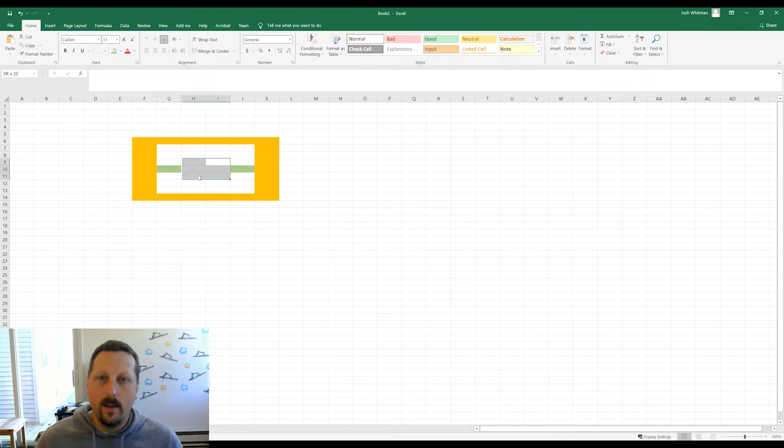We need to know some things about the gearbox before we try to pop it into FreeCAD and actually make some gears. So if we've got a ring gear, let's do some artwork here. Here's our ring gear. Okay, so you got a ring gear, and then you have a planet, and another planet on the other side, and then a sun gear. A nice blue sun.

Okay, so with the ring gear, the relationship between the teeth is: the ring gear teeth count equals the sun gear plus the planet gear on both sides. So 2 planet gears plus the sun gear equals the number of teeth for the ring gear. So if you had 100 teeth here and 50 teeth here, that would leave 50 teeth left, and between these two, that would mean 25 teeth per planet gear.

So knowing that relationship, let's start with teeth. We're going to say ring, sun, planet. And if we just choose an arbitrary number like 100 teeth in the ring gear and 50 teeth in the sun gear, the planet gear equals the ring gear minus the sun gear, divided by 2, and that's how many teeth we have.

So with a ring gear, you can do cool stuff with just a single planetary gear. But what I'm building is a compound planetary gearbox, which is 2 planetary gears that work in concert with each other. So we have a second planetary gear that also has ring, sun, and planets.

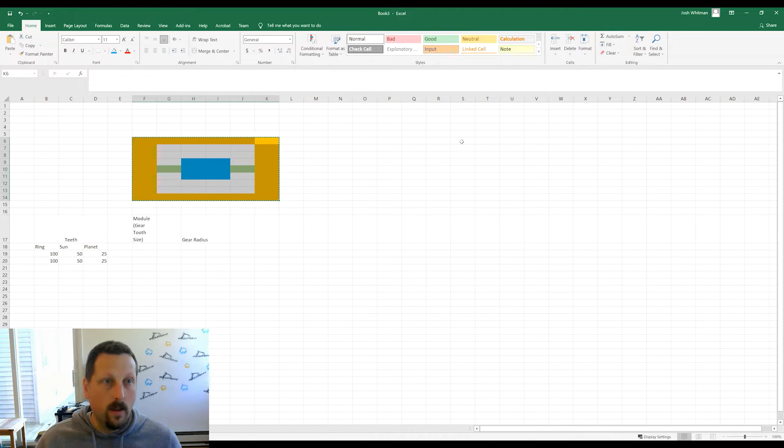Okay, we're going to start to mess up our amazing drawing here. So let's cut and paste. Let's move this elsewhere. Paste, paste. I don't know why it wouldn't let me choose paste from there. So our module—can we hit something like Shift Enter? No, okay. Looks great, so far so good.

Okay, so here's our tooth size, and this is defined by our 3D printer, at least in my case. I can only print teeth that are like 0.8mm at the tiniest, and that's way too small. So we want something like 1.6mm—2mm teeth are really good and chunky and feel strong, in my opinion, coming out of my printer.

So the minimum tooth size that you might want to work with can vary quite a bit. I can do 1mm teeth and rely on them in some situations, but 1.6 is a great tooth size, so we're going to work with that. That helps us define the gear radius, which is going to be the tooth size, I think.

Let's see, the tooth size times the number of teeth divided by 2 gives us the radius. The diameter is the tooth size. So we got ring, sun, and planet again.

What happened? Oh no, oh okay. Escape. Whoops, there we go. Okay, ring, sun, and planet.

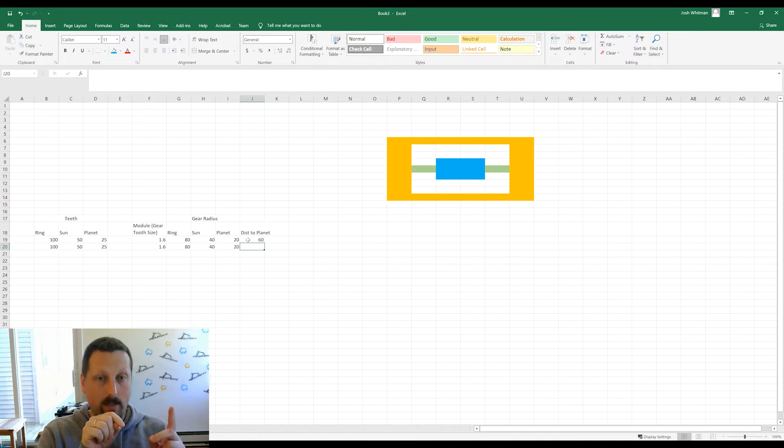And that's going to equal the sun radius plus the planet radius. So the distance from the center of the sun to the edge of the sun, and then from the edge of the sun to the center, or from the edge of the planet to the center of the planet, and those are meshed together. So this is where the axis of the planets is located.

So as the planets are rotating, they're rotating 60 millimeters from the center of the sun gear. So we'll also copy that to here.

And so for a compound planetary gearbox, that central axis of rotation for the planet gear has to be in the same place. So when we start changing these teeth counts and we start modifying the second stage to be different from the first stage, so we get something other than a 1-to-1 ratio, this is the critical thing that has to be equal in order to make a compound planetary gear work.

So now we take our ring gear, and we're going to go with 4 planets, right? That's our number of planets. So you want to work with multiples of 4 generally. If we say 100 and then we say 96, that gives us 23 teeth here and 25 teeth here.

And now we can see, these radiuses, the radii have changed. And then we see that, look, this is smaller now. It's no longer rotating about the same axis. This one's going to be offset a little bit.

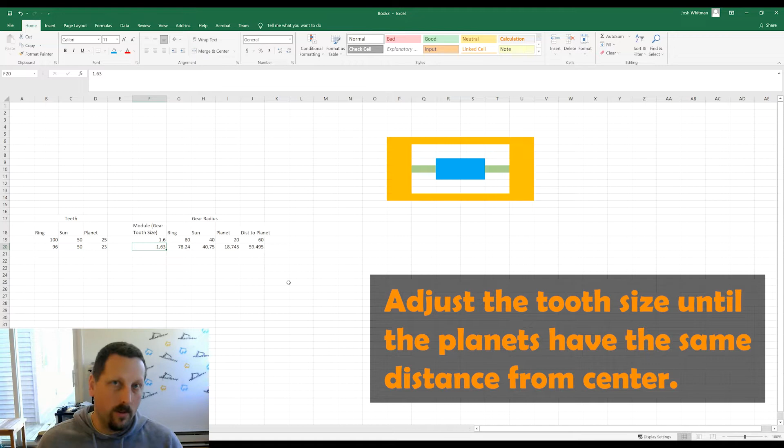And to adjust for that, we say 1.61. This is my super low-tech way of figuring it out. So 1.65, 1.63 - there's math to do it, but my 3D printer is only accurate to within like a 1/10 of a millimeter or maybe a 100th of a millimeter.

635 maybe. So all we got to do is find the tooth size that gets us to where this is close enough that our manufacturing equipment can't even deal with those precisions anyway, and then we're ready to go. So this is still too low.

1.637. We're at 1.64, 1.64, 1.645. Okay, 1.644. And look, that gets us to within, that's tenths of a millimeter, hundredths of a millimeter, within thousandths of a millimeter, 6 thousandths of a millimeter, it's equal.

We've just created a valid set of gears, and we know the tooth sizes needed to make a compound planetary gearbox where the planets of stage 1 and stage 2 are the exact same. The axes will rotate at the same distance from the center.

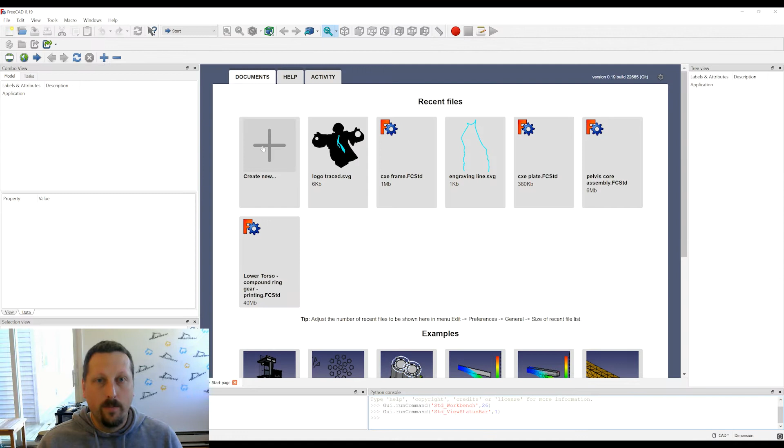So given this stuff, we can then hop into FreeCAD and we'll make a new file. And you're going to need, let's see where it is. It's somewhere in like preferences, work stuff. No. Wherever the workbench is. Toolbars - there's like an add-on manager. There we go, that's what it is.

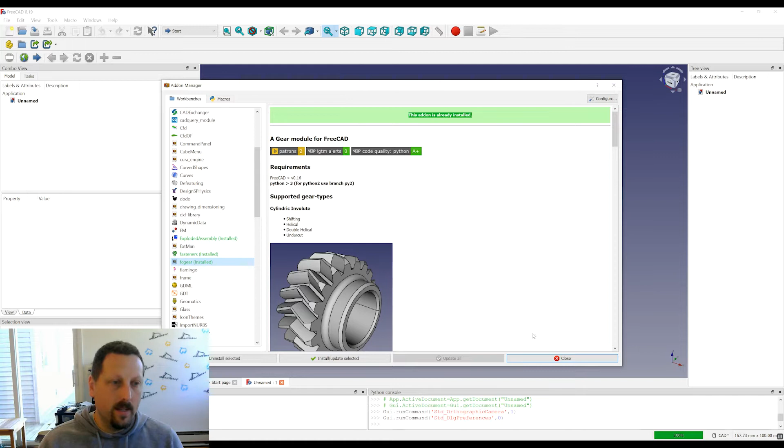So you're gonna need the gears one. It's so good, you have to have gears. Where's gears? I think it's called FCGears. FC Gear right here, that's the one you want. You're gonna need FC Gear. That's super cool. Okay, so right off the bat, we start with FC Gear. It's just called gear, okay.

We're going to make a regular spur gear. And now we have our information from here that we're going to use. Let's start with the sun for stage 1. It's got 1.6 millimeter teeth and it's got 50 teeth.

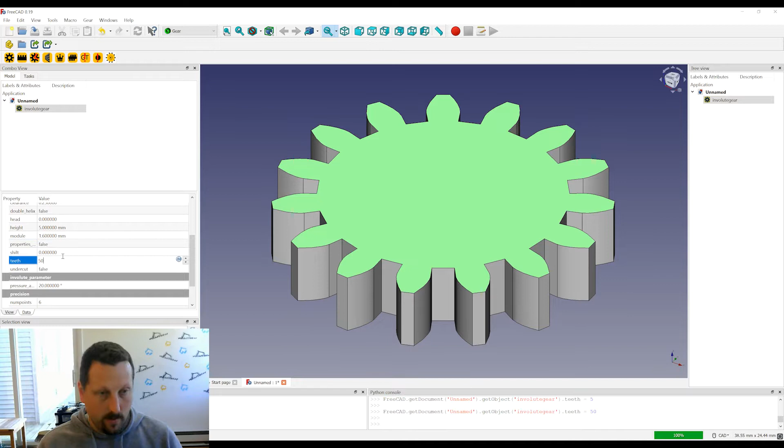So on this gear, we say, now it's going to be a double helix. Well, let's see, let's get 1.6. Modules are 1.6 and teeth is 50, right? So this thing's huge, of course. I'm not making something that I'll be able to 3D print, but you just change the teeth counts. I ended up with like 64 teeth with modules of 1.6 for a really big gearbox.

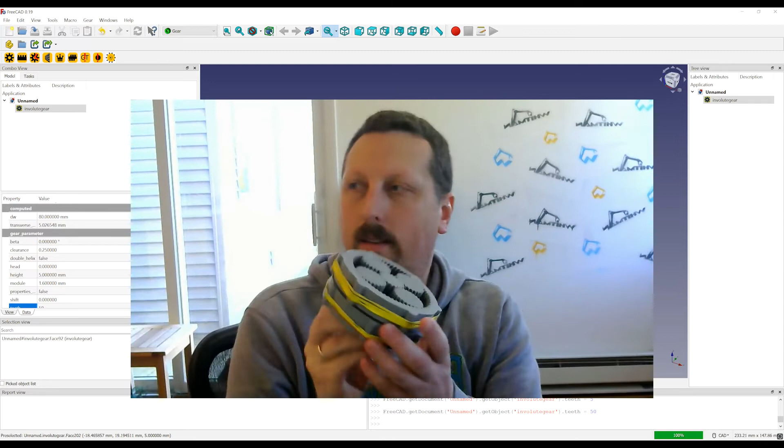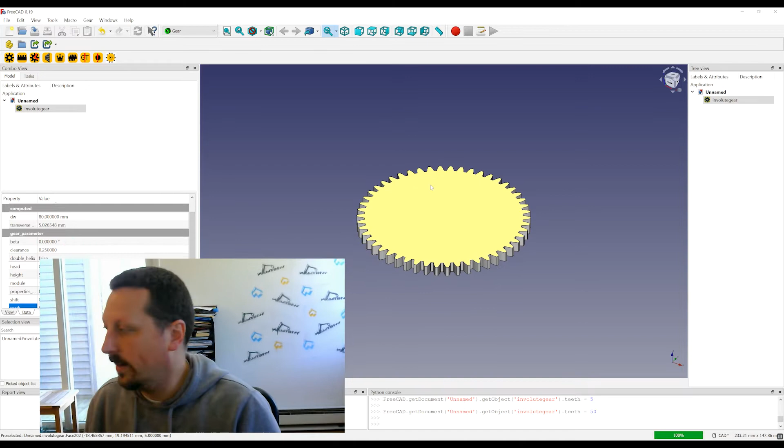For this gearbox, we have 64 and 68 teeth on the outer rings, and 24 teeth on both planets, and then the sun is probably 16 teeth and 20 teeth. So those are the numbers I used for a gearbox of this size, with modules of 1.6, and slightly smaller than that for stage 2.

Just so you have a rough idea of how it comes out physically in the real world. So we're going to make this a double helix, and we'll set a beta of, say, 15 degrees, which will give us a nice little herringbone pattern. And we're going to set the height to be 20.

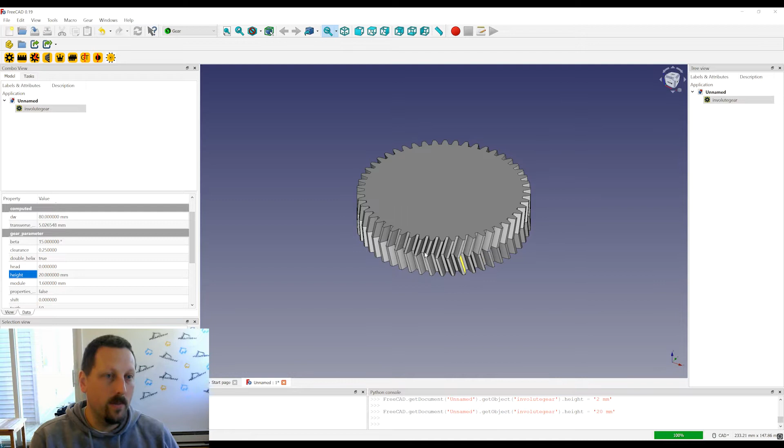The nice thing about this double herringbone is that when you assemble the gearbox, you'll need to put a little notch, a little cut into the ring gear so you can open it, get all the teeth packed in, close it back, and shuffle it to get the teeth just right. Then you usually put a collar around the outside to keep it from expanding and skipping teeth during operation. Okay, so there's our first sun, and we'll rename this to stage 1 sun.

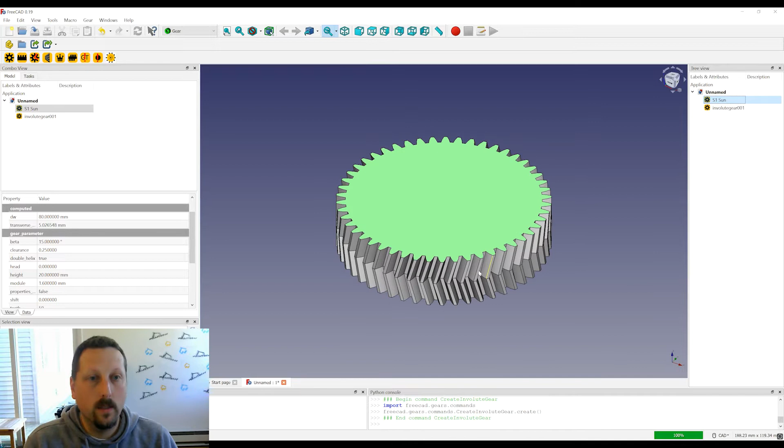And then we're going to make another one. We'll do the same thing with the double helix at 15 degrees and a height of 20, with modules of 1.6. And what are our tooth counts going to be? The planet is 25. So this is going to be, teeth is 25.

And then I think that's it. Do we just have to recalculate? There we go. Okay, so there's our sun and stage 1 planet.

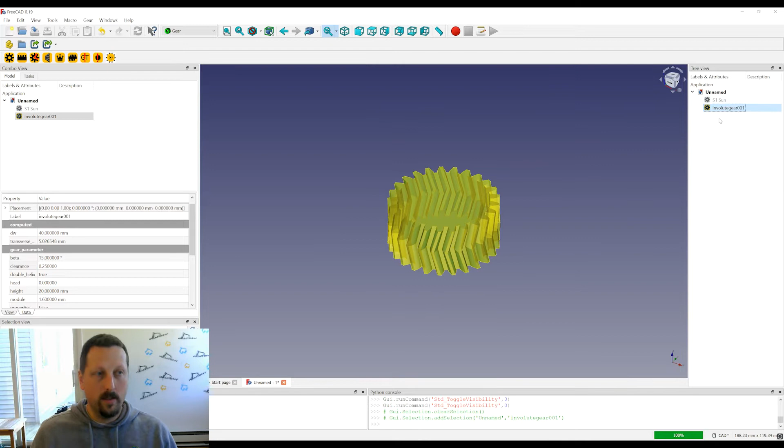Okay, and then we need our stage 1 ring, so we can turn off those. Now the ring has modules of 1.6, tooth count of 100, and it's also a double helix with 15 degrees and a height of 20. Okay, so now we've plugged all this stuff in.

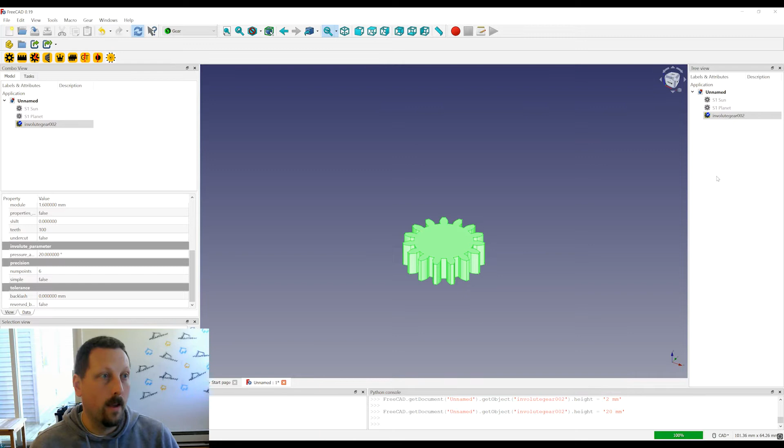And when we run this one, we're going to end up with, so there's the inside of the ring gear, and actually there's some settings here for... I don't know, I made the last ones a while ago.

Reversed, backlash. I feel like there's one for if it's an internal gear, but I don't see it now. It's there somewhere, if you look in the documentation it's there. Maybe undercut or something. Yeah, it might be undercut.

At any rate, once you've got this, you'll actually need to subtract this gear from a cylinder or something. Oop, I made it mad. There we go. Okay, we go to part.

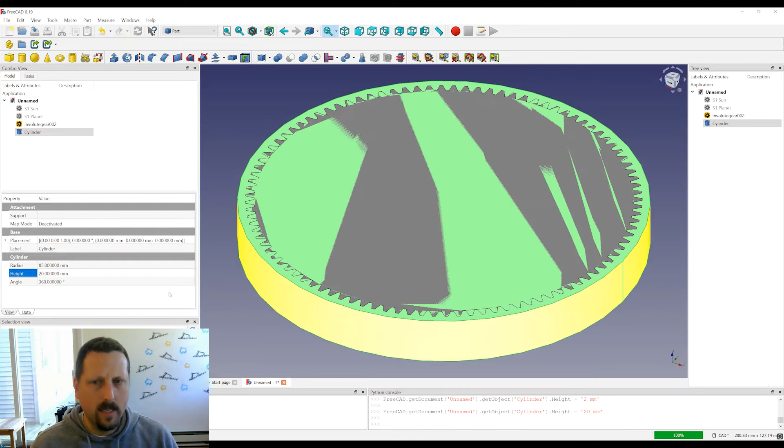And we'll make a cylinder, and the cylinder has a radius of, let's see, we got 160, so like 170. No, that's the radius, we want half of that, so if you could divide by 2, perfect. Height of 20. Now, subtracting where the heights are exactly the same is not great, so we're going to go with a height of 19.999.

998. And we're going to do a placement on the Z of 0.001. So that way it's just slightly above the bottom and below the top.

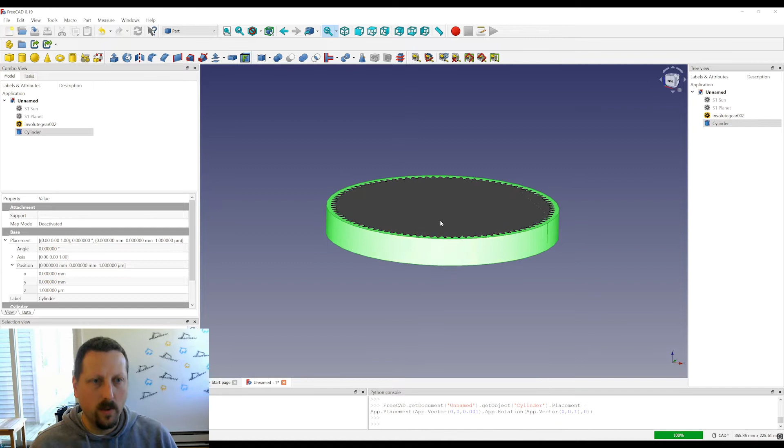And now we can take our cylinder and our gear, and we can subtract the gear out of the cylinder. There's a couple settings in the gear. Yeah, for 3D printing, you can set things like backlash that will let you put a little bit of extra gap between the teeth, so that when you're printing, if your printer is adding a tiny bit of volume to the teeth, like to the tune of micrometers of volume, you actually do want to account for that.

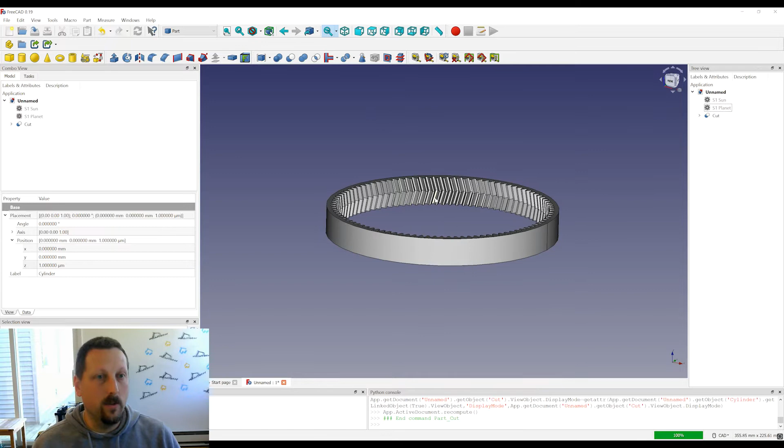So now we have a nice ring gear, and if we take our sun gear and then our planet gear, we know that the distance to the planet is 60 millimeters here. So we can just move this on the x-axis 60 millimeters, and now you've got nice tooth engagement.

We might want to rotate this by like 1 or 2 degrees or something, just to get the teeth to line up. So, okay, now it's meshed well, one of these needs a -15, right? See how these, they should be pointing to each other.

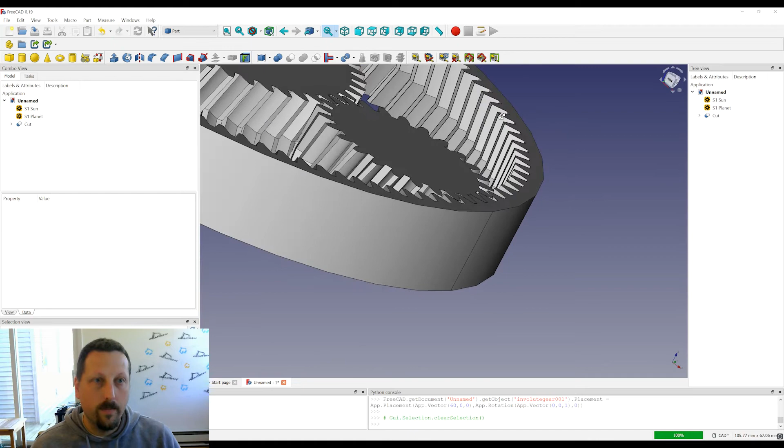Let's see. So these look good where they're both pointed the same direction, but these are pointed towards it while these are pointed away, which means they're going the wrong way. So the sun gear, instead of a 15-degree beta, we need a -15-degree beta.

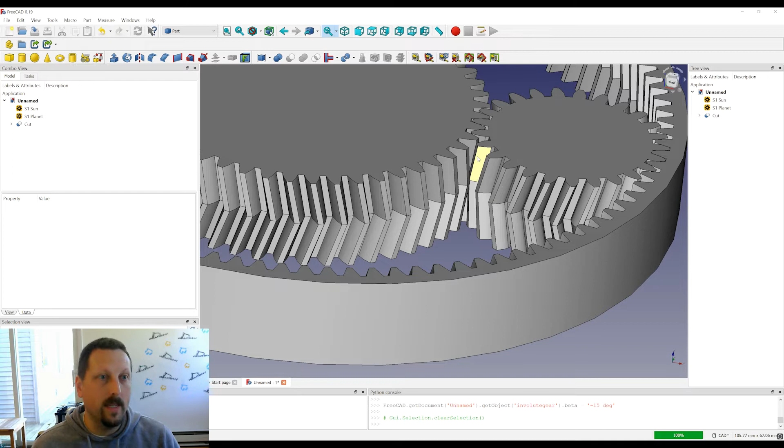And then we should see the teeth. Yeah, so now they're pointing in the same direction, where the V of the tooth here, they're both pointing in towards the enmeshing of the gears. And if we go to the other side, they're both pointing out of the enmeshing of the gears. It'll be the same over here, where the V that the herringbone makes here and here are both pointing in to where the teeth are enmeshing with each other.

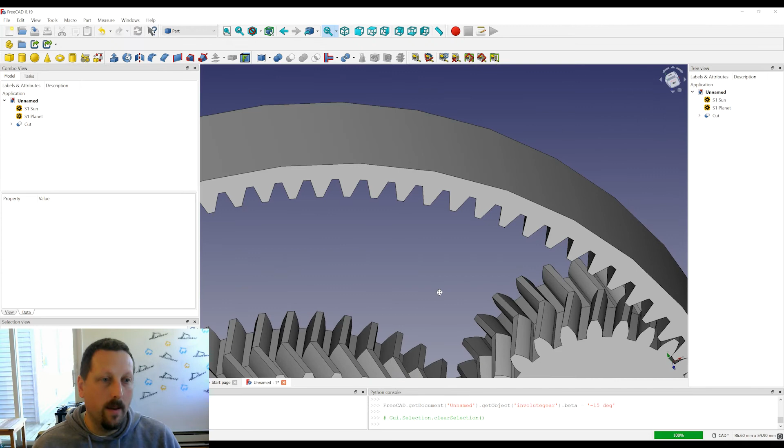So now we can see we've got really nice engagement. Everything looks really cool. We can take this planet, copy and paste it a couple of times.

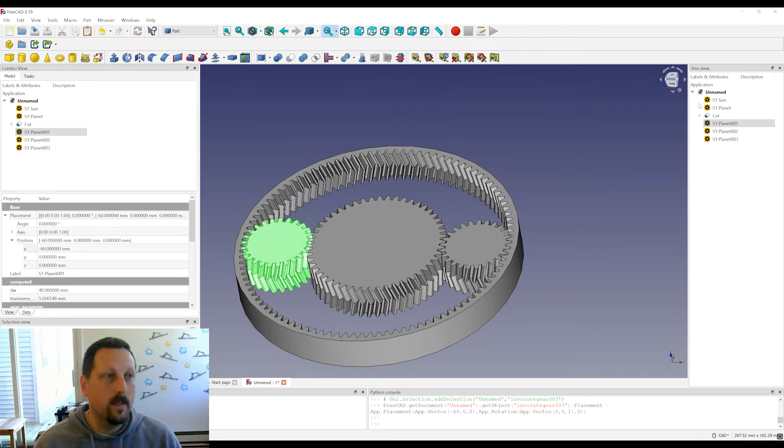And then we just change its placement from 60 to minus 60. This is by no means a comprehensive tutorial, but this is how I did it. And then we say 60 there, and we say minus 60. Yep, that's way too far.

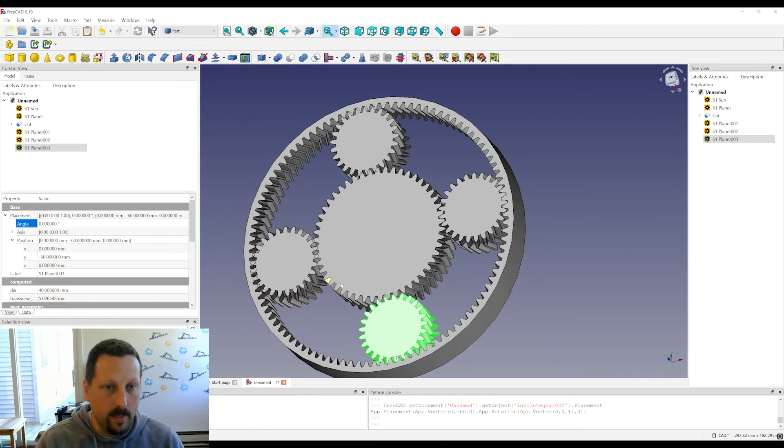And 0. And there we go. And then we can, as needed, rotate these so that the teeth are lining up properly. You know, so we should.

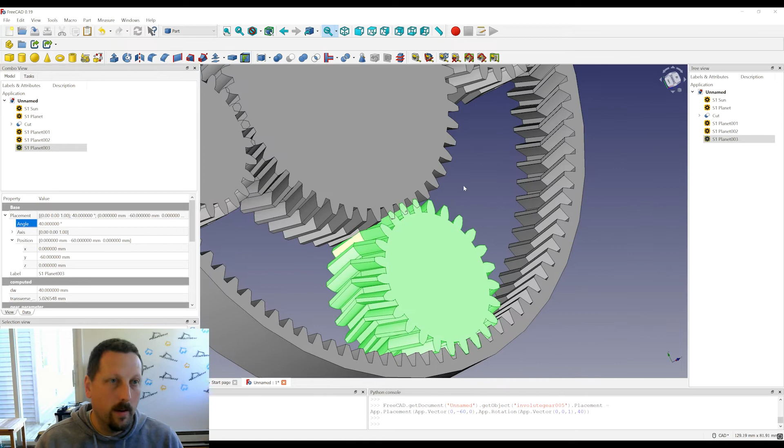So these never quite line up, and that could be because I chose 25 instead of something divisible by 4. Yeah, that's a bummer. The rule of thumb is that the teeth counts should be divisible by the number of planets you have. In this case, we could almost do 5 planets. I don't want to try that, but we could. Everything's divisible by 5, but then we get 23, and that's where the issue would come into play.

So what we'd want to do is like 102, and then 52, 48, 44, 40, 36 - we're fighting a losing battle here. 104 and 36, 40 - there we go. Okay, so 104, 40, and 32. Because 32 is divisible by 4, and these are also divisible by 4. Is that right? Yeah, 26 times 4.

Okay, so we want to do the same treatment here where the ratio - there's 4 planets in our final gearbox. If you had 6 planets or 10 planets or whatever, then you want the tooth counts to all be divisible by 10 or 6 or however many planets you have. We're having 4 planets, so everything needs to be divisible by 4.

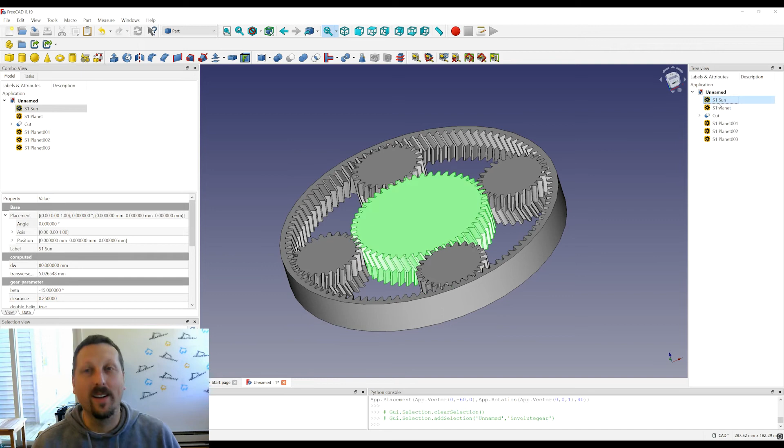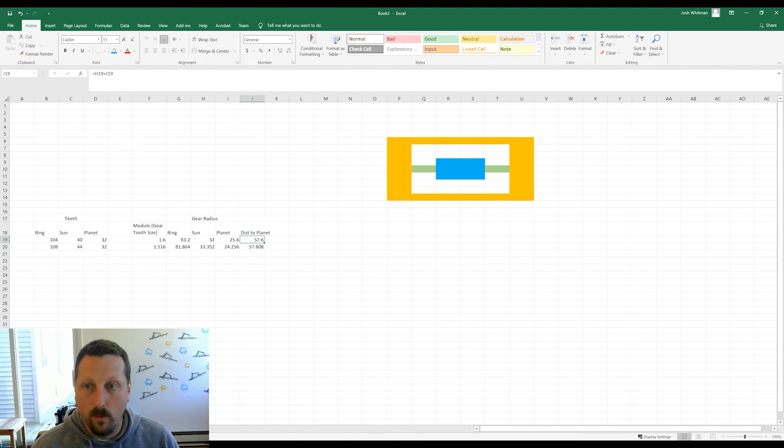Okay, so let's go fix this mess. So 57.6 is our distance. We have 104, 40, and 32. At this point you guys are probably like 'oh this is torture.' It is torture - making these things, you gotta do a lot of stuff. Okay, so our tooth counts are gonna be: the ring is 104, the sun is 40, and the planet is 32.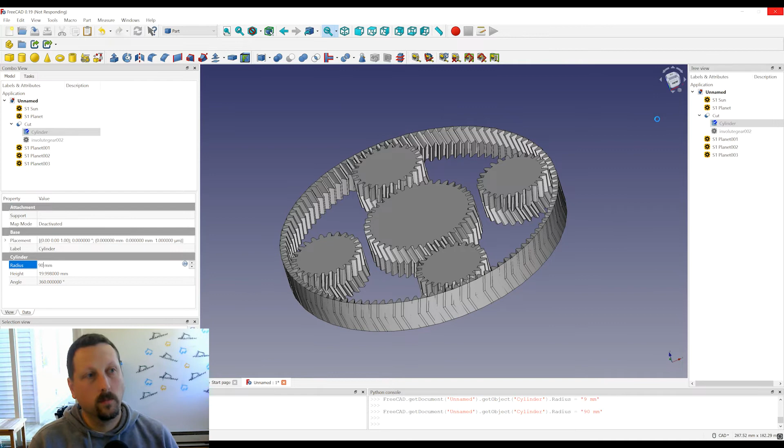The ring is 104. Our cylinder needs to be just slightly larger in radius, so let's say 90. Doesn't really matter because this is just for demonstration. Let that recompute. There we go. Okay, now we take our planet, and this has 32 teeth.

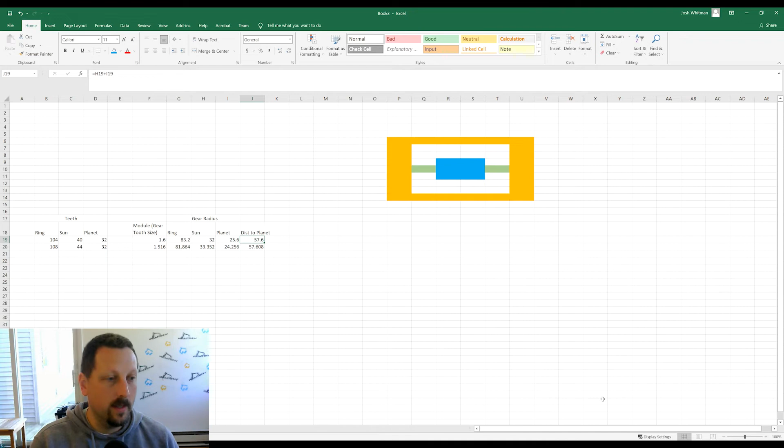Meanwhile, does that look insane to you? Let's put the right number in and see how insane it looks. Meanwhile, it is only 57.6 from the center, so we go over here to position 57.6, and now we can rotate it a little bit, and see if we can get the teeth to mesh up.

Oh, that's right. Okay, so we rotate that, and then we go to the sun, and we rotate it. Give or take just enough that the teeth are obviously enmeshed with each other.

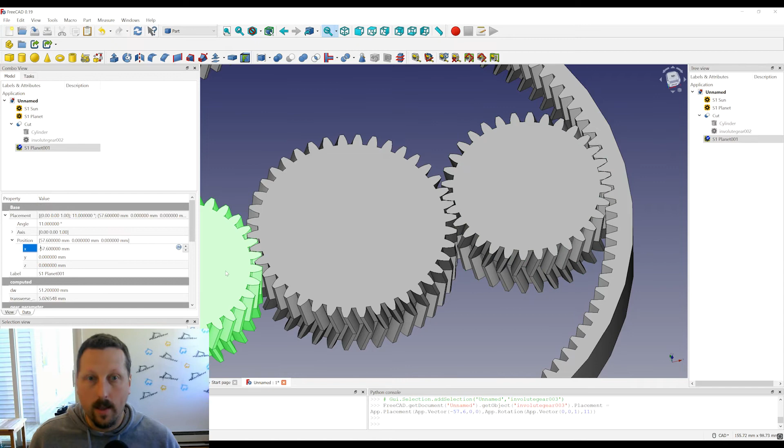Now we can remove these ones, and we'll make a copy of this. Its position will be minus that, so it's over here, and you can see the teeth line up. Now because it's divisible by 4, we should be good to go. We'll do another copy of that, and instead of that, it's going to be on Y. It'll be 57.6, and we can see the teeth are meshed up there, just the same as they're meshed up here. And that looks really good.

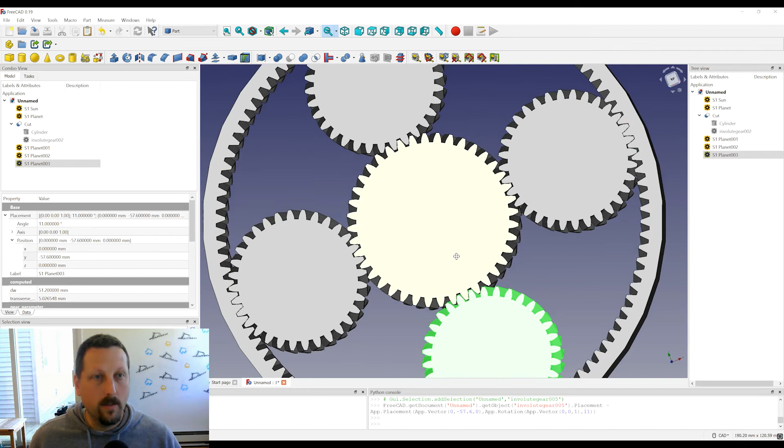We take the same thing here. So yeah, being divisible by the number of planets is going to be kind of imperative to making the teeth actually mesh up with each other. And now we can see the teeth are enmeshed more or less exactly. I don't have it perfectly dialed in across everything, but all you do is just rotate these ever so slightly by less than a degree until eventually they're perfectly aligned with each other.

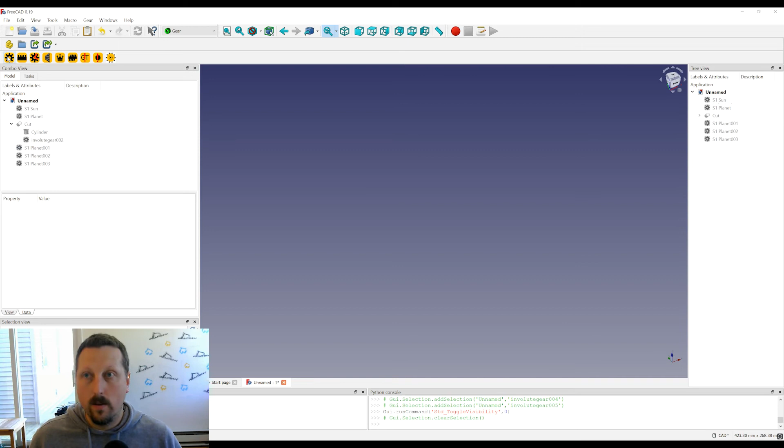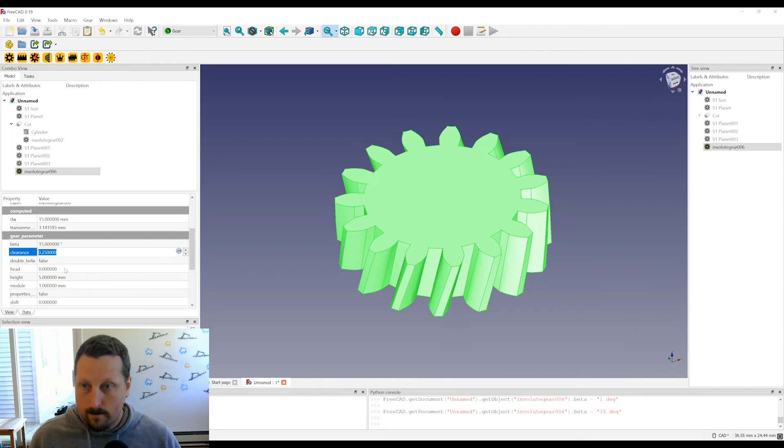So there's stage 1, and then we go back to gear, and we're just gonna hide all of that for right now, and add the second stage of gears. So we're gonna take these, and for the second stage we're working with 1.516. We have 108, 44, and 32. So beta of 15. Height is 20. 1.516. What?

1.516, and okay, so kind of there we go. 108.

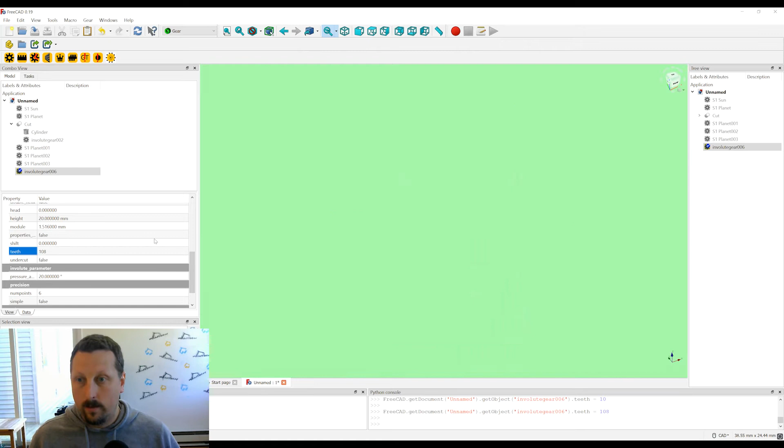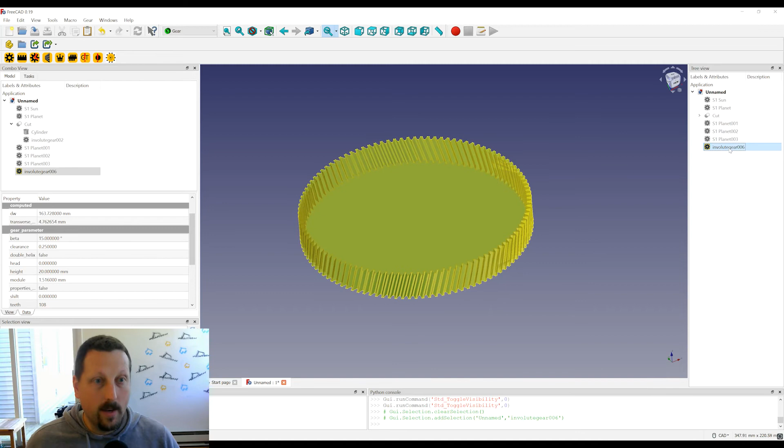So if we compare that to the ring gear here, you can see it's just ever so slightly a different size, just a tiny bit smaller, and that's perfect. The closer they are, the higher the gear ratio, like 300 to 1 or something. You can get crazy high gear ratios with a single compound planetary gearbox. So that is Involute Gear 006.

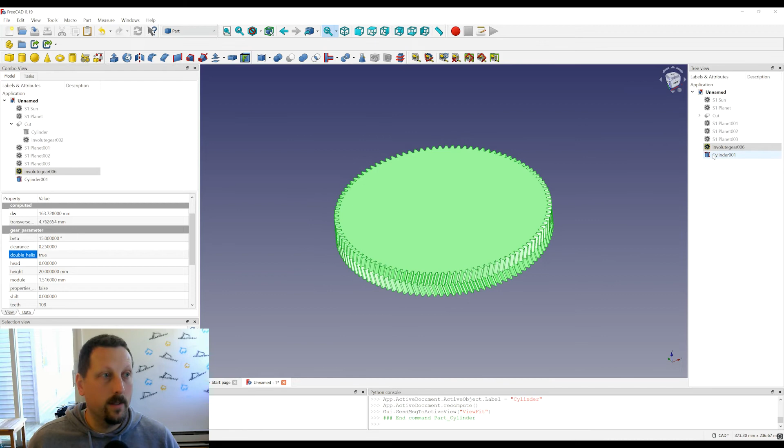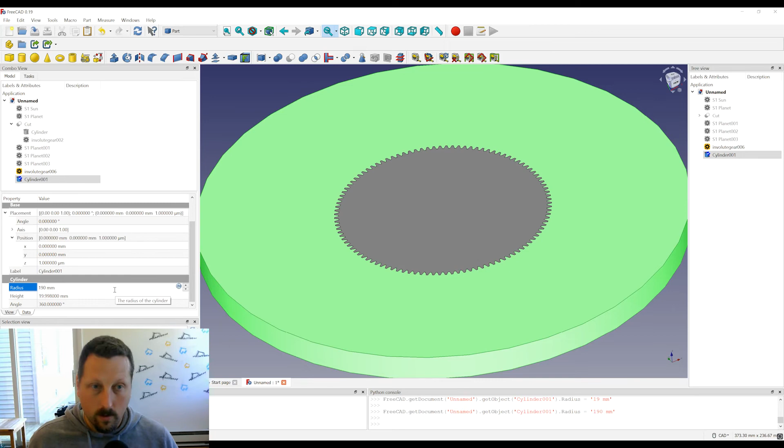We take that. Oh, it's a double helix. And then we'll do the same thing with the cylinder. So we go over to part, and we make a cylinder, and this cylinder is 19.998. Has a placement on the Z of 0.001. A radius of, we'll say, 190. Of 90, yeah, that looks good. We could even come down a tiny bit. Something like that. And then the Z, oh, 1 micrometer. Okay, I thought that got messed up.

Now we take our cylinder and our gear, and we subtract. And this gives us the ring gear for stage 2. Slowly but surely.

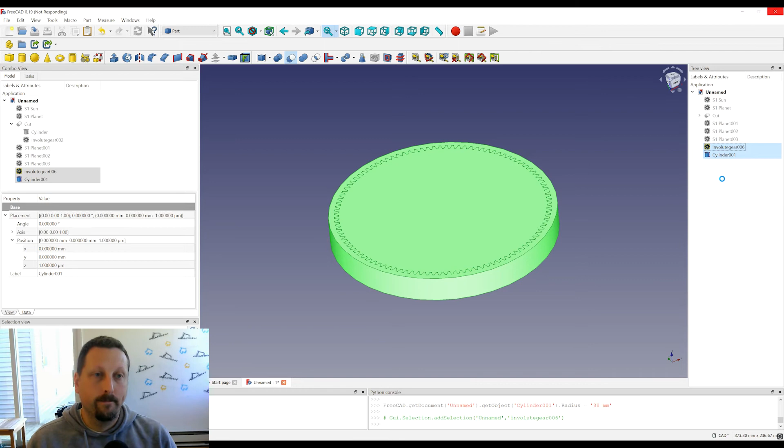There we go. Okay, there's the ring gear, so if we look at the stage 1 ring and the stage 2 ring together, you can see they're just the tiniest difference in size and the gear placement. You can see they're ever so slightly out of phase with each other, which is perfect. We're going to get a really high reduction ratio. We'll get a ton of torque out of it, and we'll slow it way down, so you can pipe a fast motor into it and you'll get a lot of torque out of it.

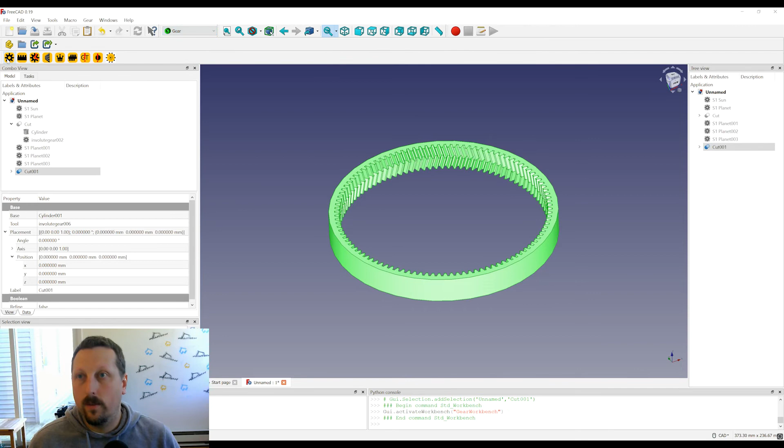Okay, so there's the ring gear, and then we go over to gear, and we've got the sun gear. So here's the sun gear, has an angle of - did we determine the sun needed a minus 15 in the first one? Oh, that's the wrong place for an angle. 0 is good there. Oh, I'm not even in that. There we go. Wow, none of this looks right. Okay, beta is minus 15.

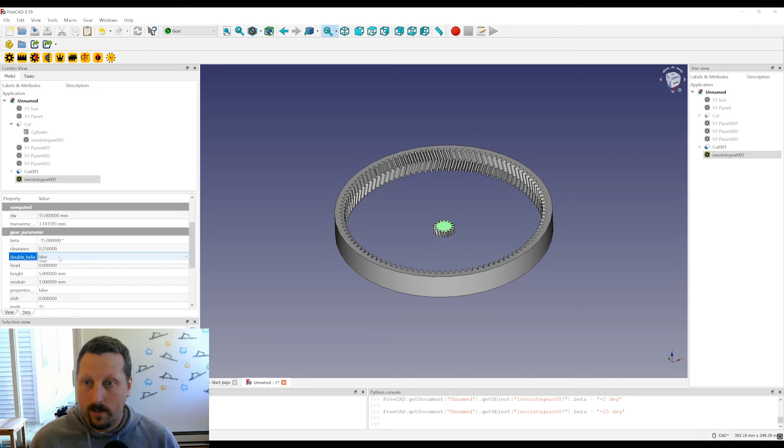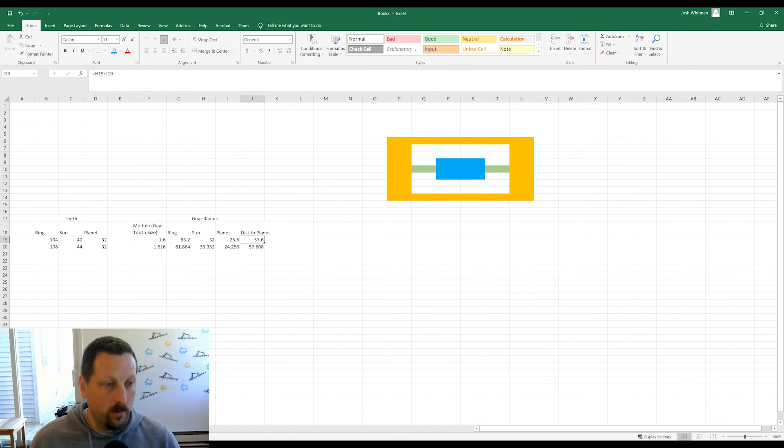The double helix is true. The module is 1.516, 44 teeth. That's cool, that's all good. Oh, the height needs to be 20. Height is 20.

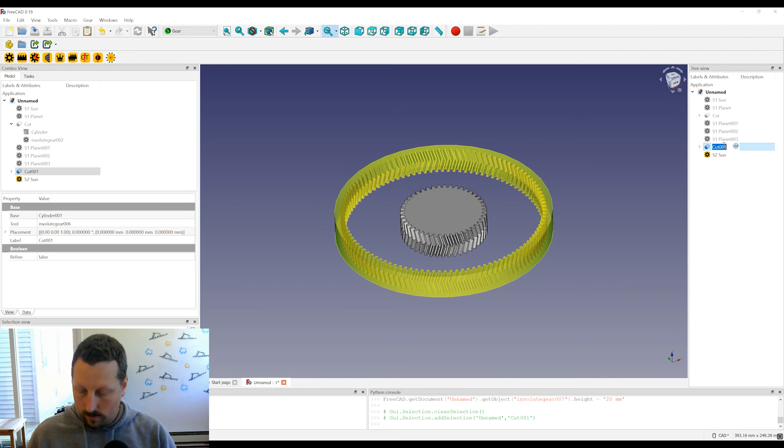And then this is S2 sun. This one here, S2 ring. This one here, S1 ring.

Okay, and finally we add our planet, our S2 - oh, it's hiding inside the other ones. Okay, beta of 15, double helix is true. Module is 1.516. Teeth is - what did we come up with? Oh, it's 32 again, okay, 32. We have our height, height is 20. Okay, go ahead and calculate that.

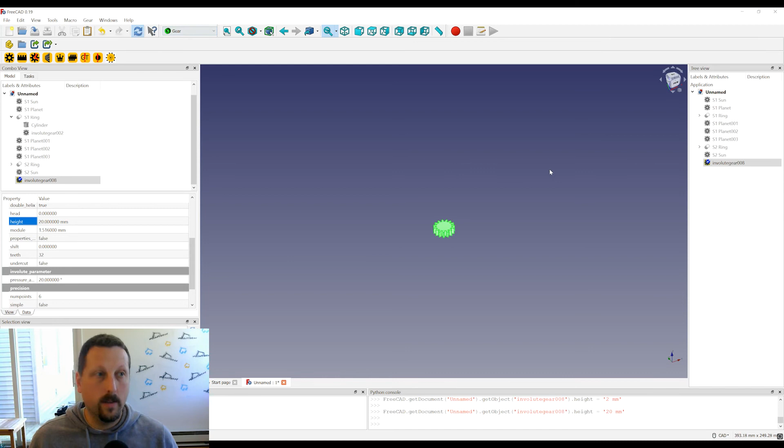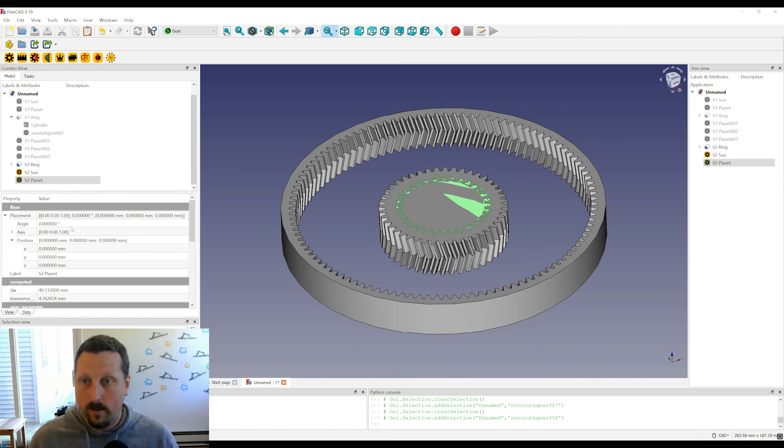Okay, and there's our stage 2 planet. Right, so we've got our ring, sun, planet. And now the critical factor is that the planets are offset exactly the same distance between stage 1 and stage 2. That distance is 57.6. So we go over here and we position this at 57.6.

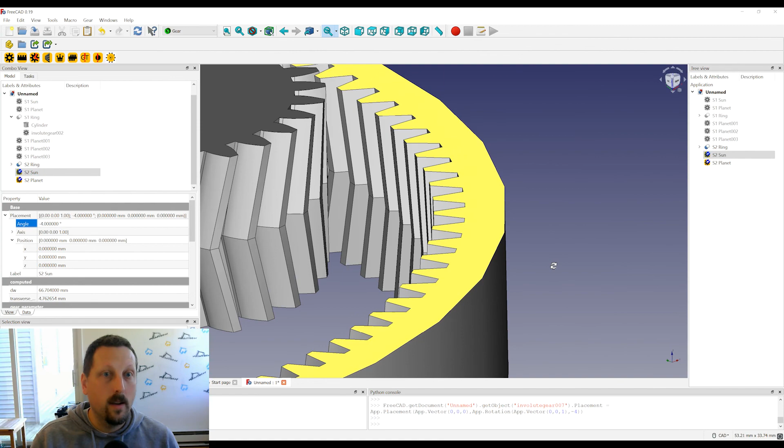And if we look, the same phenomena - the teeth are enmeshed nicely here, out of phase on the sun. So let's just rotate the sun a little bit. There we go, and we should see - yep, those V's are pointing towards the meshing there, and they're pointing away from the meshing here. So we know the teeth are all angled the correct angles, so the gearbox will come together.

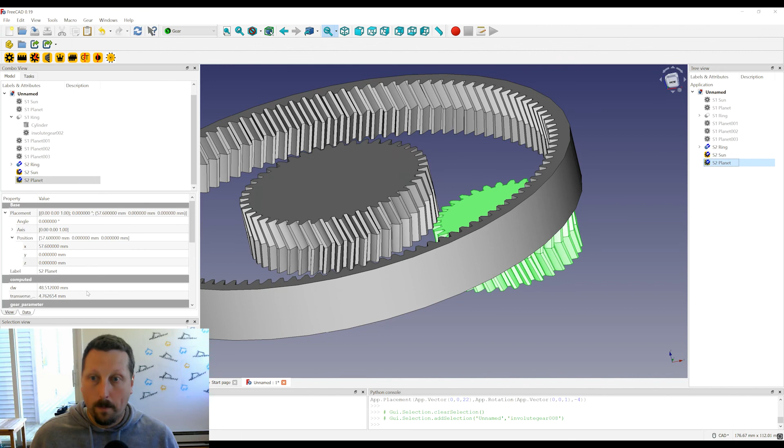Now we take this and we are going to move it up. Let's go 22 millimeters up. And we're going to do that on all of these so that when we turn on the first stage, we can see them stacked on top of each other. We'll see that these two planets, ever so slightly different in sizes, but enmeshed nicely in both of their rings and both of their suns. So all of that looks great.

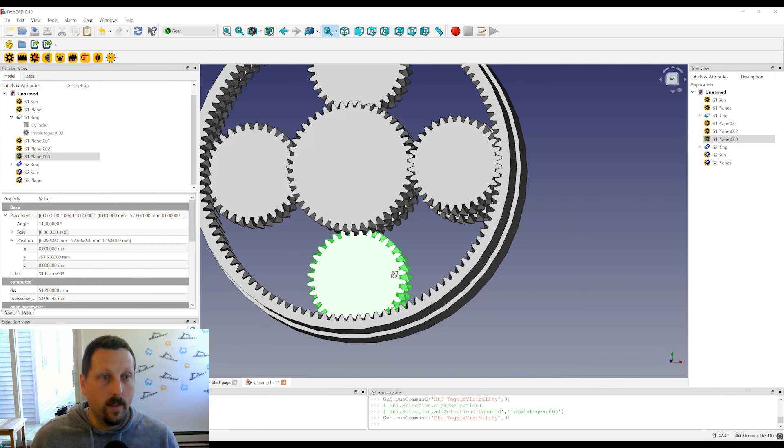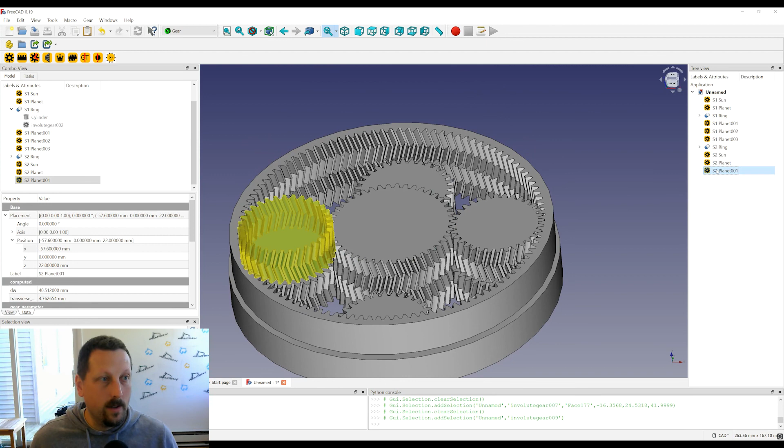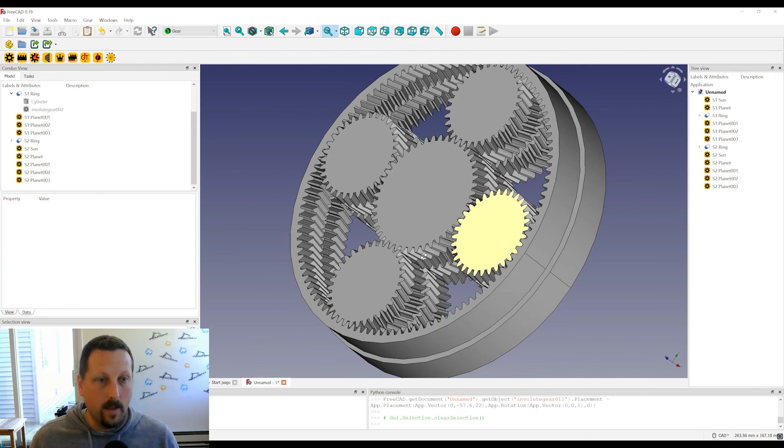Last thing we want to do is take our S2 planet, copy and paste it. We'll flip it over to the other side. Okay, so we pop that there, and then we take another copy and we're gonna put this at 0 and 57.6 here. And then we'll take this one and make a final copy and make this Y minus 57.6. And that is now a fully functional compound planetary gearbox that's going to give you a ridiculous reduction ratio.

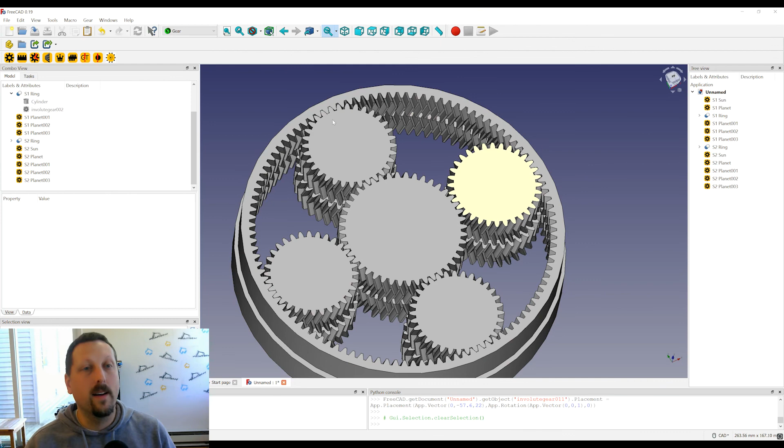There's a lot of free space here, which you might want to actually consume with more planets. So you might re-engineer the tooth counts and stuff to have 5 planets if you're dealing with modules of this size and tooth counts of this size. Make all the tooth counts multiples of 5 instead and do that. But that's the long and short of it, really.